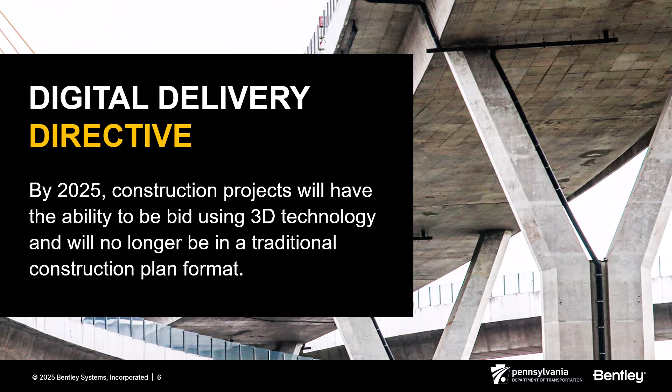It's a 3-year project. In that project, utilities, drainage, widening, that is all modeled. That is how it was delivered to the contractor. Initially, no cross sections even. So the contractor had no cross sections. I'll talk about some of the hiccups with that. But part of the hiccup is the technology. Having things as easy as flipping a page is what I've heard from the contractor. I can flip the page to get to that. How do I go over that?

So we set that goal, like I said. We met that. And part of the last conversation was, what is digital delivery? Well, really, we're trying to modernize how we deliver projects today, that process. And how do we do that? It's digital workflows. It's digital delivery. What are we delivering? How are we connecting? How are we exchanging the data? And can we repeat that workflow?

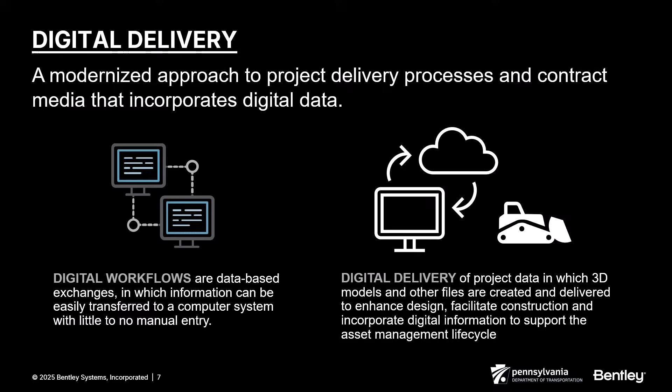If I can't repeat it, most of you are not going to adopt it. Most of you are not going to move along if it's something you have to relearn over and over again. So as part of modernizing this, we have to approach not only the technology, but the workflow. How do I reproduce this? How do I move it forward?

The other thing is, I talked about life cycle. To us, it's the life cycle. You know, in that traditional one, you spend a lot of time working on CAD files that somebody made a copy of to work on something else in it. There were duplications. There was that disconnect for review because you gave them a PDF that was sent out 10 times in an email and somebody had to bring all those comments back together.

We want to eliminate some of that because there's redundancies, there's problems, there's things that get missed when that connection's not there between the reviewers, the designers, even construction. So a lot of times we duplicate things because we weren't communicating. We had that disconnection. So you were siloed. You know, maybe roadway was working on something and bridge was separately working on it. They made a change, somebody over in roadway didn't get told to change. So you got to think about talking, and that doesn't just mean within the design units, that means construction, that means asset management, that means everything.

But as we move towards that model-based, that digital delivery, we want that single source of truth. I don't want silos. We want that connected environment. We want things that, hey, he updated here, my model updates over here. It's connected. There's that transparency. We're seeing that as it moves forward. Continual communication. If something changes, we're seeing it. We're seeing issues. We're seeing communication that, hey, I updated this today with the issues and things like that.

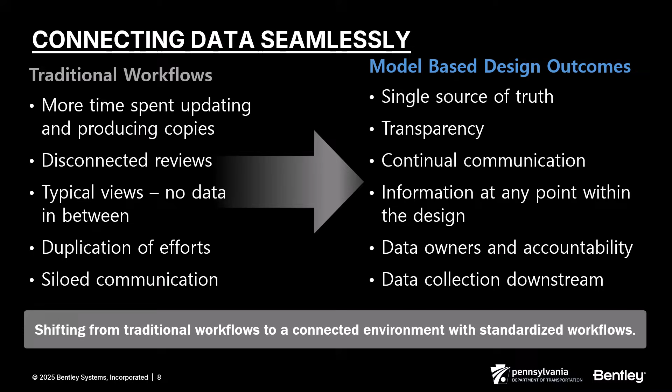What's that downstream deliverable? You know, we all kind of want that open standard that eventually I can give any file to any contractor and they can work on it. Today, it's an industry problem. I mean, today, I can give a DGN to a contractor, well, that contractor may use Autodesk, may use Trimble, Topcon, Carlson, whatever. They may not be able to accept that as a DGN. So hopefully in the future, maybe IFC or something else feeds into that.

So with PennDOT, one of the things that you really have to realize with digital delivery is it's standardized. If you don't standardize and give them a process to follow, you're going to fail. Part of this is, where do I have to put my effort? You know, we heard the comment about cost on that. How do I give them a direction? How do I give them the information they need to do this design and move forward? What level of detail is in that model? I got to set that. So we've done that interim guideline today that actually gives examples. It's not just text, it's visual examples. Here's what I expect out of you in that model. So we're trying to prepare that workforce for this policy that I'll talk about here in a little bit.

But again, we're also developing standards on the CAD side. I have to have that standard for the technology to work. If I have 10 different consultants and designers doing different workflows, using different features, using different labeling, that technology isn't going to know what to look for yet. Maybe in the future AI helps with that. But today, I have to set something so that it knows what to look for, how to check it, how to move it forward. So it's kind of setting that template, setting those resources, and developing that next process.

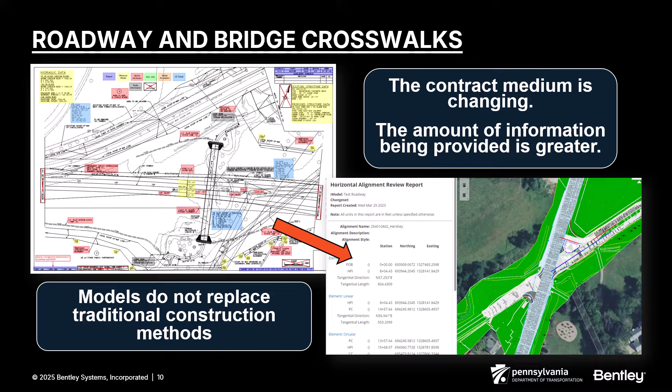Somebody goes into a sheet today, they know where they're looking for the information. But tomorrow, where do they look for it in the model? So we've started to develop those crosswalks that give them a legend to, okay, you found it here, now you find it here. It's building that transition. It's helping, it's change management. How do I manage the change for my organization as well as my business partners?

And I will say, there's lots of lessons learned. We have projects that have been built. We have the 68, where the model's a legal document. That's the one that's in construction right now. And then we have the ADCMS grant IFC project that's advertised right now that lets in 2 weeks. So we're in different realms right now.

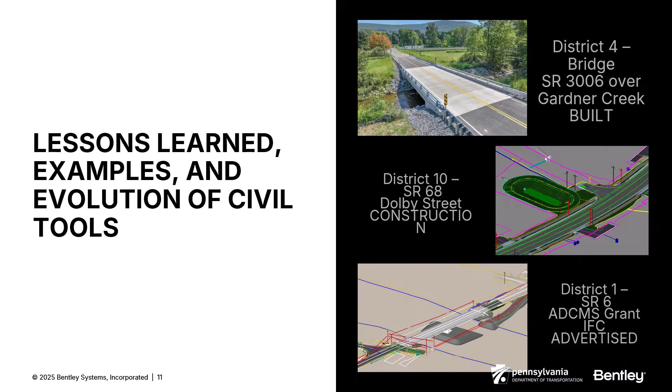We're not just doing everything as pilots necessarily. Some of them are pilots, but they're real life pilots. They're putting it to the test. It's trying it and not being afraid to fail at trying it. And again, it's being willing to adapt, meet the challenge, give the feedback to, say, Joe, or as a consultant or a contractor, give me your feedback. What's wrong with my workspace? What do I need to include for you as a consultant? It's that partnering.

One of the big changes, we don't have a plan set. So how do we shift from plans to a model? We took kind of a different approach. We have what's called a certification memo. This certification memo has a link that's embedded into it that points back to our ProjectWise through an API. Our internal IT wrote a program to go back to that. It gives the contractor the ability to go there, click there, and download anonymously.

So it's there. It's going to have an MD5 check on it so that if they download it, they can check to see it's the same file. We can verify it's the same file that's sealed in that document. So that's replacing our title sheets. The data's in our ProjectWise though. It's not sitting out on some other server or anyplace else. We are an on-prem ProjectWise today. So we're controlling that information today.

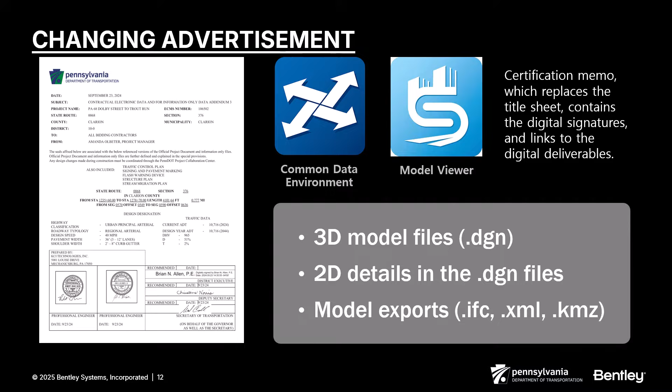And again, we're not making copies. We're not copying out to a bidding system or something like that. We're leaving it where it is, where that certification memo points to. It's that single source of truth. And again, as you heard, not just talking DGNs. We now have IFC files involved. There might be XMLs that are being provided as well because of that challenging construction to be able to digest the data.

So, how do we move this? How did we get to where we are? I'm going to tell you right now, part of it is vendor relationship. If I didn't have Joey and some of the other guys giving me new tools, trying to solve issues and work with us, we wouldn't be where we are today. We need more technology. We need more things to do what the contractors, what the consultants want. That's where our voice, when Joey was talking about the innovation council, that's how we voice our concerns, our needs, how we improve this. Again, like Kyle said earlier, it's that passion to do better.

But part of that is I need reproducible workflows. Because if I can't reproduce it, my consultants are not going to want to do it. If I can't make it so that I don't have to recreate a project, they're not going to want to do it. But the other thing is, I have to make this data to a point where designers, contractors, consultants, inspectors trust the data. It can't be the comment that, hey, you guys are giving me crap models and I'm not going to use them. That doesn't work. We have to do better.

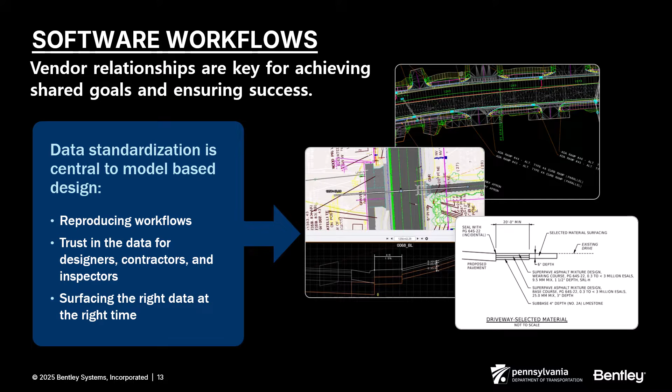And I use an example of that as superelevation. I went to an IHEEP one year. I went to 11 different DOTs. All 11 gave me a different answer for what superelevation meant from the AASHTO Green Book. So it has to be able to adapt to our organizations. Today, as I think Kevin kind of hinted, there's not that single standard that everybody's going to meet or follow across the country. So it has to adapt to that.

So let's listen to a consultant perspective on one of our projects.

Hi, I'm Rob Nuss. I'm with KCI. I'm the practice leader for the highway group here in Harrisburg. For the Route 68 project, I was a project manager, really responsible for pulling everything together and then checking the model. Rob, as the project manager, what processes changed or didn't change as part of this digital delivery project?

The big change is in the checking. Again, we don't have plan sheets, so you're checking the model with mostly checklists. But the overall process, the process of dealing with your subs, coordinating with PennDOT, line grading, typical section, that whole process really didn't change a lot. We still had summary sheets, we still had special provisions, we still had to load everything into ECMS. Just that final deliverable was really different with not having sheets, but in general, the process is the same.

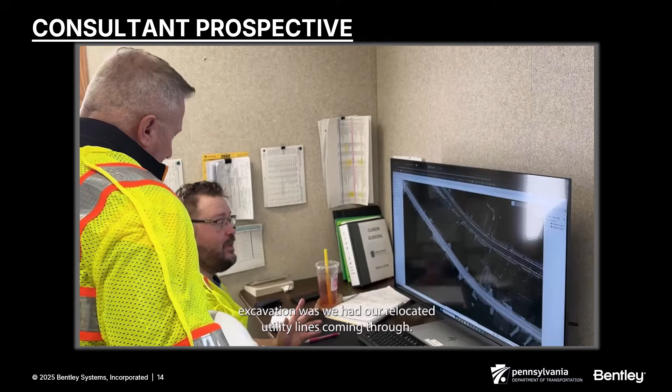I'm Steve Brown with KCI. I'm a senior project engineer. For the SR68 project, I was the model manager and lead designer. And you did the modeling of design. So what helped you with modeling all of it that you didn't see on the plan sheets? Yeah, one of the big things that we did notice when we modeled the culvert excavation was we had our relocated utility lines coming through, and we did see that with that excavation line that we were going to hit the new relocated water line.

So we had to alter it and move it, and that was one thing that we would probably never see from the previous way that we used to model things. And that was during design, correct? That was in design. You could probably save money if possible. I would say so. If it was not moved, they would definitely have an issue out there.

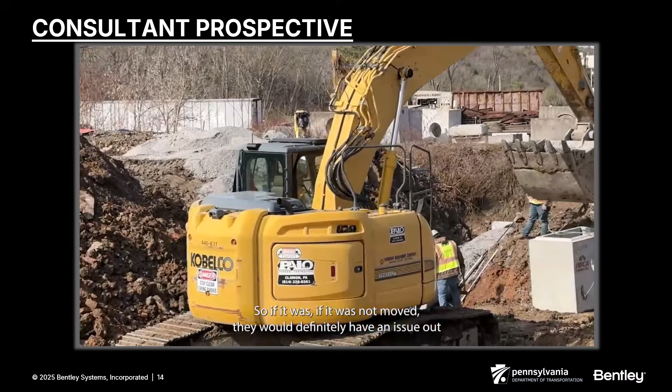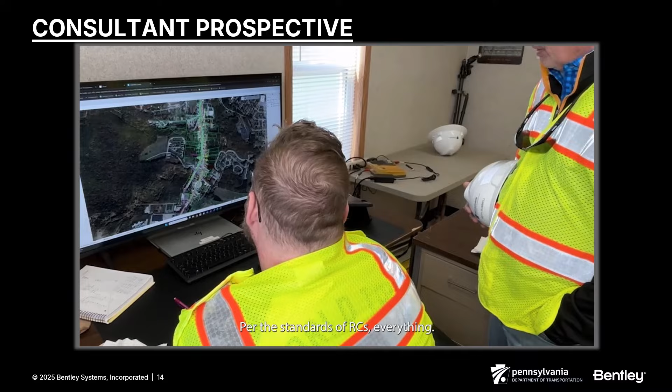Yep. Hi, I'm Megan Fry with KCI, Engineer in Training, at the Pittsburgh office, and I was a designer and responsible for utilities and drainage for the SR68 job. And Megan, you've been using OpenRoads and Infrastructure Cloud at the same time. So how did you utilize both programs to help you do your design better? Already, you can make the change while you're looking at Infrastructure Cloud. So in Infrastructure Cloud, you can do a profile, 2-point cross-section, a cross-section anywhere in the project. So if you were adjusting drainage, you can make sure that the pipe would be deep enough per the standards of the RCs, everything.

So you were able to utilize both products at the same time? Yes, Infrastructure Cloud is a lot faster than ORD. So if you needed something quick and easy, use Infrastructure Cloud, and then you can make the change in ORD once. So do you think this made your design faster? I do think it helps. I guess you can make design changes a little faster because you knew immediately what you needed to change instead of going in ORD trying to open up the profile or cross-section.

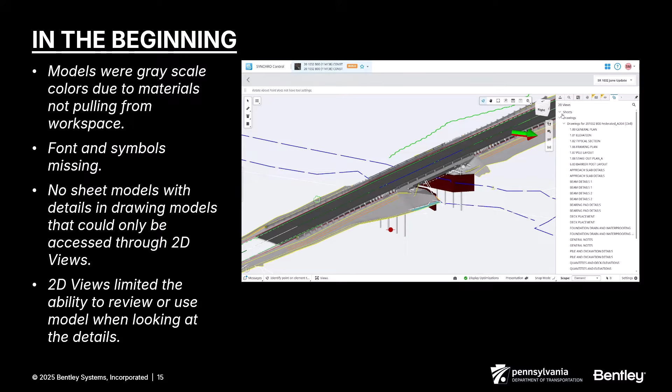So let's talk about how this has changed for us. That's the consultant's perspective today. So in the beginning, which 68 was one of our earlier ones, you notice the model on the screen. A lot of gray coloring. The materials weren't coming across. We had drawing views that, when you open them, you can't look at the model at the same time. So you had limitations. We had issues initially with ProjectWise and fonts even. So a lot of the stuff was hand-drawn. A lot of it was drafted still. It was data that somebody had to redevelop. It wasn't data that updated maybe with the model.

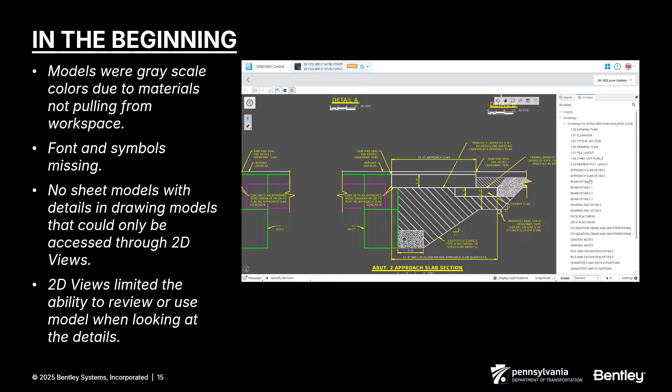But you can see here, it's very limited. Sometimes drawing models didn't come across. 2D views don't always work. That information isn't coming in one-for-one at times. So there were a lot of issues at the beginning that we had to go through. We had to address hurdles. We had to talk to Joey and the team and say, hey, how can we do this better? How do we go to the next step?

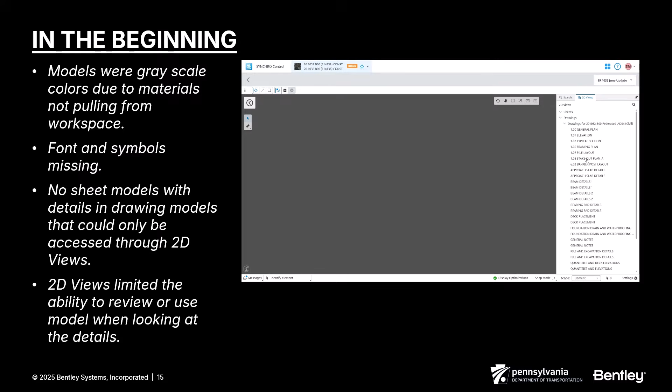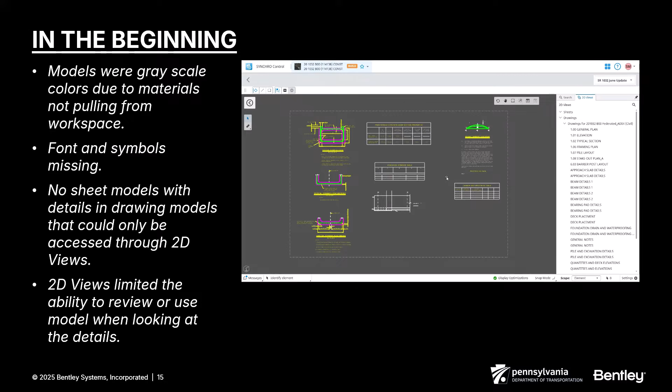So as we're going through that, right now I can see the model, but if I opened up the sheet back then as that drawing model, I couldn't look at the model. I couldn't look at the two side by side unless I opened a whole other window. That's not really easy to do a review if you're doing that, right? So it's very limited. Today, though, we're using data visualization.

We have pay items in here. So I can click on drainage, and I can say, all right, I want to see what's in this model drainage list. It's going to highlight. We're trying to give the contractors an easy way to get to the information. We can't just say, here's a model, try to learn how to read it. I got to give you some steps. So with the data visualization, I can start to point them to the drainage pay items. We can use drainage profile and look at the information for that system.

So now I have all that information that I can turn on and off too. Maybe I want to see a specific piece of information. And this isn't just important to me as a designer, it's important to construction as well, because they need that invert, they need that elevation to build. So it's information we both need.

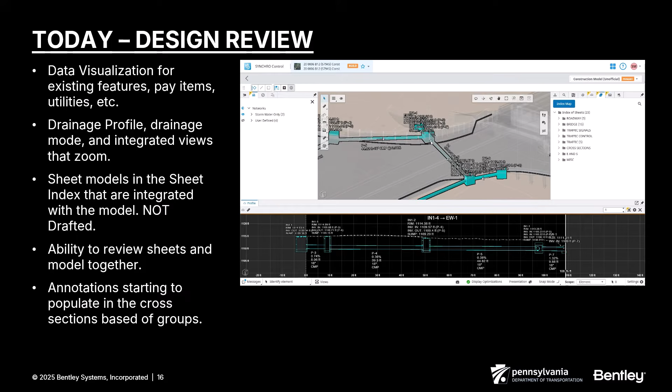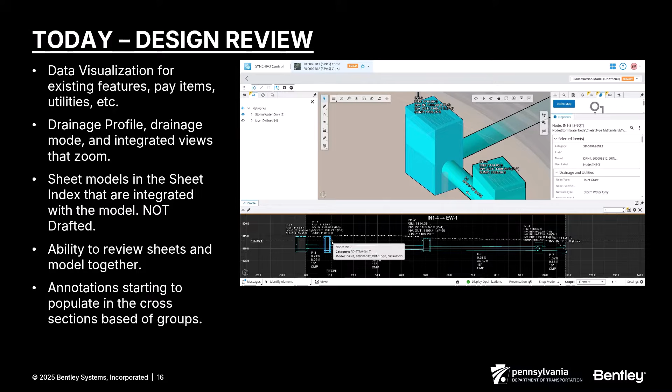And I can look at it through a profile. I can look at it in that 2D or 3D view. I can look at that information. And it becomes dynamic now too. I click on an inlet, it's going to take me to it in the 3D or 2D view there. That integration now is there, that the stuff is talking from view to view.

Think of a contractor, if they had that view up and said, hey, I'm going to work on these 5 inlets today. They can just go down the line, clicking one to the next as they need the information. And there's metadata on that information. The pay items are there, that information is there.

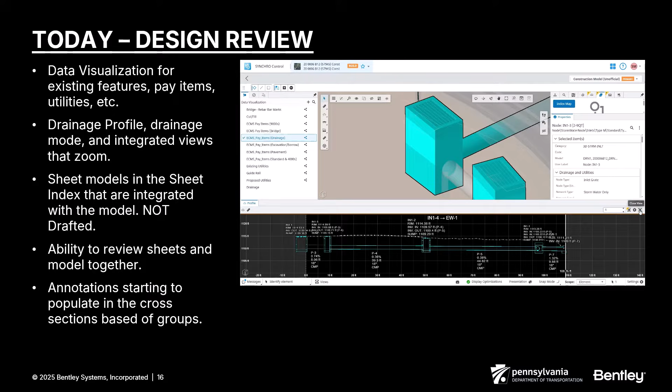So, beyond that, what else have we changed here? Well, sheets are in the sheet index now. They're not in those drawing models. So we're using sheet models like you do today with ORD. Same process you're doing, putting them into the sheet index there. That sheet index is what's pulling it across into infrastructure cloud. So I'm doing a workflow that's very similar to what I do today and getting another advantage to it.

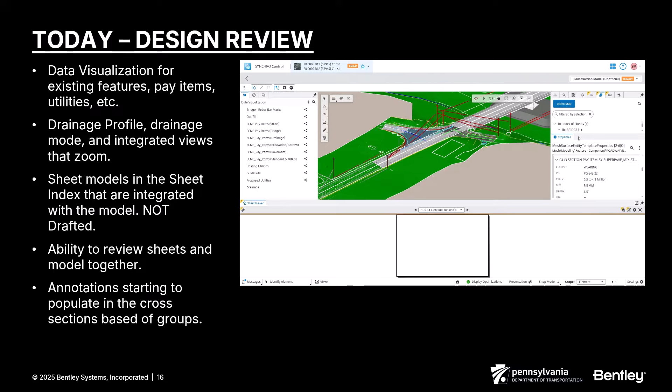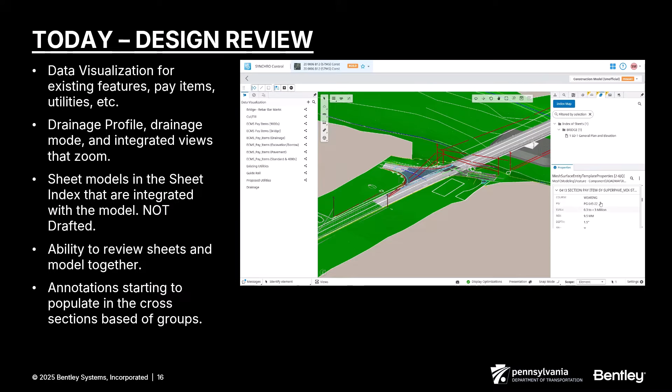I'm not creating a PDF review. I'm creating a sheet model out here in the software review that I can put issues on. I can track them. I can mark them up. The model can point to where it is, or I can go in there to that list, and you can see there's a folder structure. That folder structure is what I have set up in my sheet index in ORD. It comes across, looks the same.

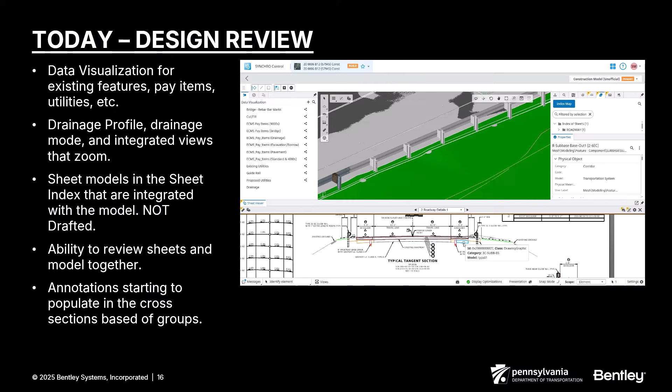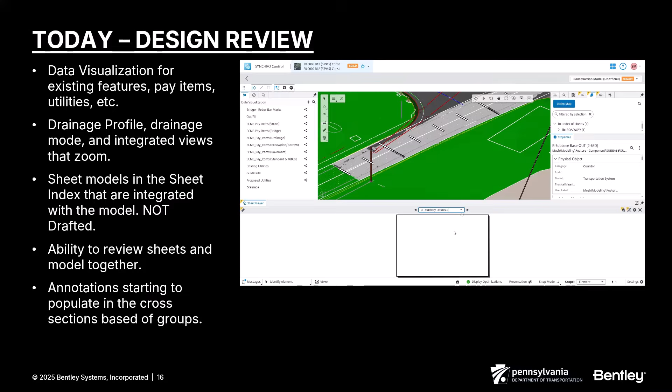Now, these typicals, they're not hand-drawn, they're not drafted, they're interactive. They're slices of a model. It's integrated. It's not something somebody drew in 2D that doesn't update. It's information that if that model changes, it changes.

So we're starting to really get to that integrated piece where providing a PDF is kind of going backwards. If I can look at the CAD file for where they are, I just saved a step. I don't have an external piece here now. It's part of the model. It's delivered in the model files.

And while I'm looking at that sheet, I'm looking at the model, I can open cross sections even. So I have multiple views, multiple ways to look at the information. I'm not stuck with just the model or just the sheet. I have all that now.

We talked about annotations. There's some stuff coming here. Now you see we're starting to get annotations that are based off of groups. So I can dictate, hey, maybe I want these things to have width, depth, elevation, offset, that information there that maybe I want to be able to turn on or off. Maybe the contractor wants to do one operation that day. I can break the information up.

I'm not just giving them a cross-section that has all kinds of annotations on it that are cluttered and close together. Now they can turn things on and off. They can adjust that information we're looking at.

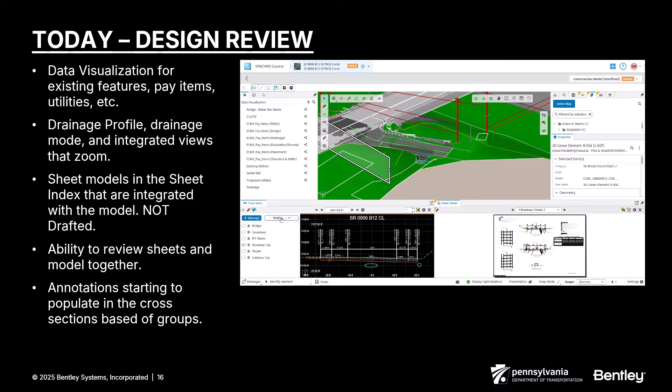The other thing, before I start the video here, you'll see there's a filter. This is version compare. We started versioning files. We started setting them up so that we could version the models in there. By doing this, I have an audit trail of how the model changed. And you can see there in that filter, there's added, removed, and modified. And you'll see what that does here in a second.

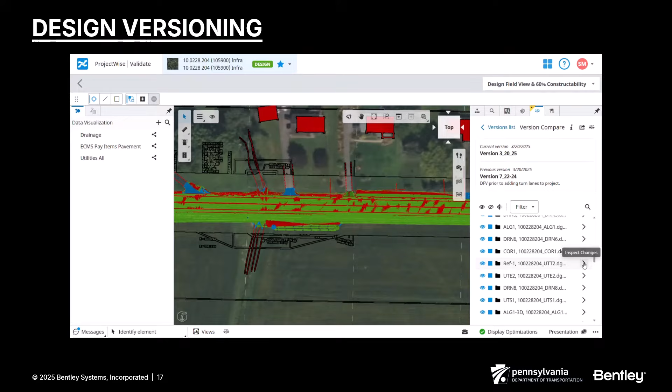So everything in red is removed. Added is green, and the blue is the modified. Now I can interrogate this as an entire model, or I can interrogate it as an individual file. And the example I'm going to use here is drainage, because drainage gave a great example of this.

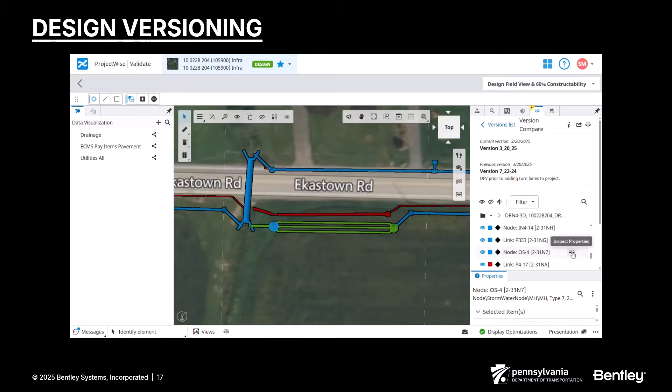So in this case, this project went from a 2-lane to a 3-lane. They had already designed it as a two-lane network. They were just going to go through and do that. So they eliminated the pipes that they had in the initial model, moved that one manhole out, and added the new pipes. I can see that change.

But I could also go in and inspect the properties. So now I can see side by side the information that changed. The node name, the elevation, the offset. The information is there that I have a way to actually find it.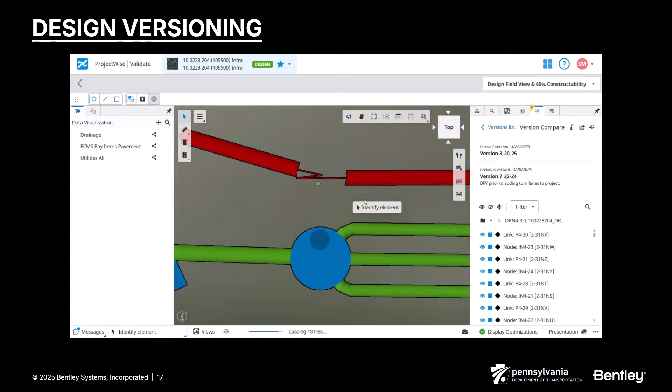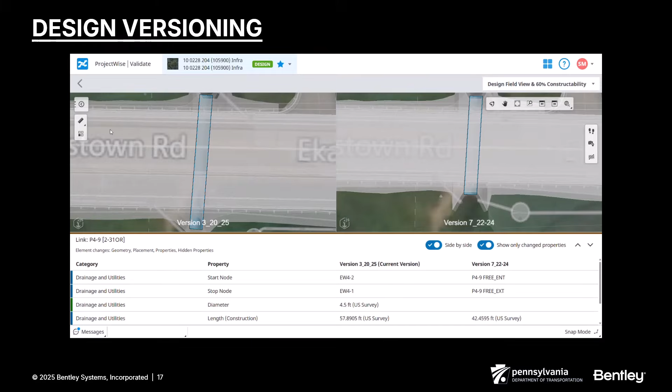If I'm going through this visually, just looking, I may miss something that moves 6 inches, a foot. With this, it gives me a way to track and check and start really interrogating the model. And it works for pretty much anything in the model. Whether it's pipes, end walls, maybe an item changed on the pavement, it's going to reflect that through the version compare. So we're starting to get the tools to really start interrogating models.

Something like this is one of those pieces that you had to have. Otherwise, I can't say that I was checking every single piece of this model. It's hard to see every change, to know every change, especially when you're talking now metadata.

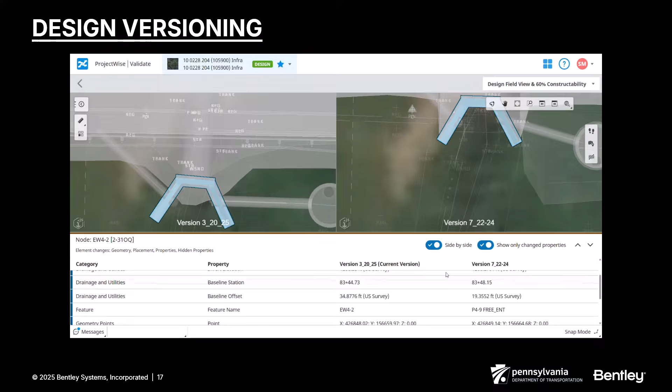Cross-section. So I kind of hinted at this. This is one of those areas that we're kind of readjusting with construction. So contractors like the dynamic section, yes. What don't they like? They need to manually place an offset and elevation. So talking about that annotation and auto annotation, which is a work in progress. This is not finalized. It's still being worked on, trying to clean things up.

But the thing about it is, they still keep asking for some paper. And one of the justifications we've heard is, I have laborers. I have people that won't have an iPad. I have somebody that's tying rebar on a bridge abutment in a mud hole. I'm not giving them a $2,500 iPad. So they still want something they can use or a way to kind of get that information.

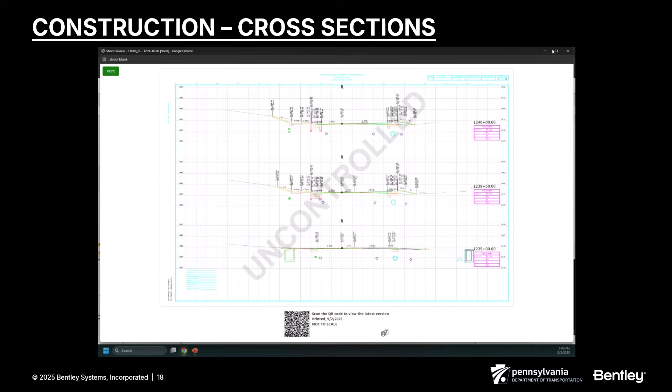So you can see here, cross-section, just like you see in ORD. They come in, you can see the 3 lines showing what's on it. Oh, hey, there's a print button. You can see it says uncontrolled across it. The uncontrolled is to be a warning to the contractor. I need to verify this is a usable piece of paper still. I need to go back with that QR code and check to see, did the model change?

And I can tell you, we've delivered one project with a model where a 2D deliverable was printed, given to a third party. A construction change happened. They didn't give the updated sheet. The result, there was a bridge built 3 feet off. So, controlling that print, controlling that information, making sure that they're using the latest information is very important. So if you do go to a print, make sure you have a way to control or point them back to the data you're using. That's a key part of that.

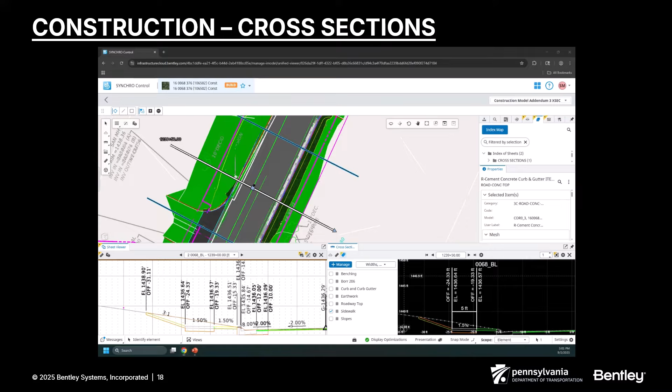We've learned that lesson. But you can see all the information, whether it's through annotations, whether it's through sheets, the data's matching. It's there. And who knows where this could go in the future. There are still thoughts. How do we improve this more? But again, there's lessons learned. Hey, I can deliver it, but maybe that contractor takes that DGN and prints it on their own. That's where we want to start controlling where they print from, where they get the data from. That single source of truth. And control what comes out of that single source of truth.

So let's listen to the contractor. Tom Stefanski with Minneke Contracting, Northeast Pennsylvania bridge contractor. We employ about 50 to 60 personnel throughout the course of the construction season. My role on the project is on the front end, estimating the project, and then during the course of construction, some project management duties and technical engineering.

What would you do differently on the next digital delivery project? From the bidding aspect, I know my way around the system a little more, so I do a lot of things differently. Just simply more educated now after experiencing the process from start to finish. From a construction standpoint, I don't really think that there's too much we would change. I thought the personnel on the project did a great job, and the entire team did a great job.

Since the completion of the digital delivery project, have you incorporated any lessons learned into other projects we're currently working on? Simply communication. The next time we do a digital delivery project, we can take what we learned here with us. Do you have any final points you'd like to make about the project or digital delivery process? However, wherever the digital delivery process goes, don't forget the small subs and suppliers that don't have the resources to navigate the system without specialized equipment and training.

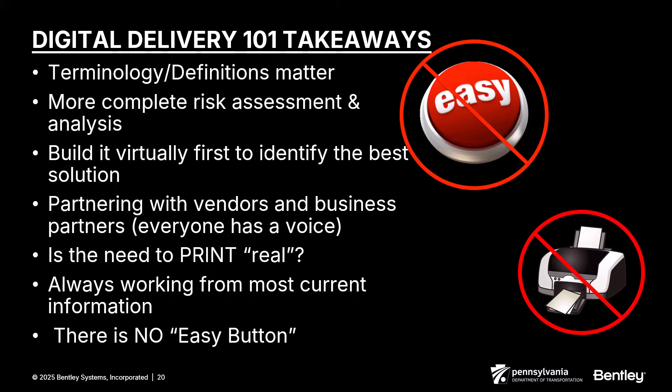So what's to come? PennDOT, August 7th, had the implementation policy signed. What's this mean for PennDOT? Each district in 2027 will have 2 projects that will be delivered as digital projects. We have 11 districts, so that's 22 projects. '28, 3 projects. '29, 4. '30, 5. So in '30, that's 55 projects.

The other thing, beginning in '29, integral abutment bridges less than 90 feet in length will be digital delivery. 2030, new construction and reconstruction projects of a roadway will be digital delivery. And this is all being housed in our ProjectWise on-prem. What does that do for us, putting it on our ProjectWise? I manage the workspace. I manage the change.

The best way to keep this going is to standardize and make sure you're managing that change, controlling that change. I don't necessarily want consultants changing the workspace or deviating from things that are in our standards. I want them to come to me and say, hey, I need this change to do my work. I need this. Give me the feedback. Let me adapt it. Let me meet your need. Then we have one source for that workspace.

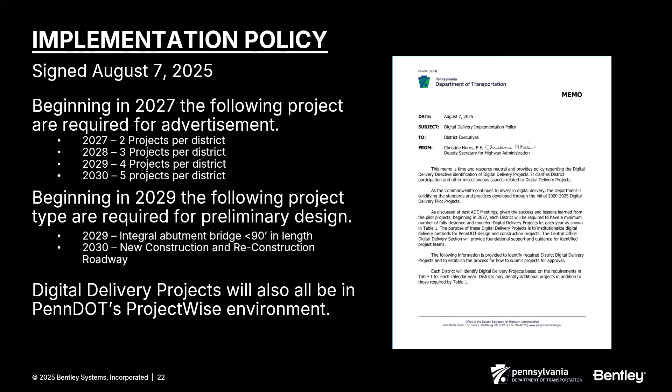I don't have something that maybe you've adapted, I've updated, and now your data's overwritten because you've done it someplace where maybe I've already made changes. So we want to control that interaction. We want to work together.

The other thing I talked a little bit earlier about, higher education. We are talking to 17 different universities across PA. We're doing presentations at them. We are talking to the students. We are showing them what we're doing, what the products can do, giving them a sandbox to go into. So classes are actually getting into our data sets and looking at the information we're producing. We're giving them that chance to experience this and learn it.

As part of this also, those universities are working with us to develop future curriculum. How can they prepare for that next wave of engineers? How can we prepare them to do what we're doing today? Because we know training is part of the process. We want somebody who comes in possibly available and ready to run with the project, not that I have to spend 6 months, a year training them to do some of this stuff. So if we can prepare that next wave, we want to do that.

So again, we want to start to get the next generation even thinking about this. This isn't just for me, this is for the future. And again, it's a partnership. It's not just design, construction, it's even future. It's beyond what we're working at today.

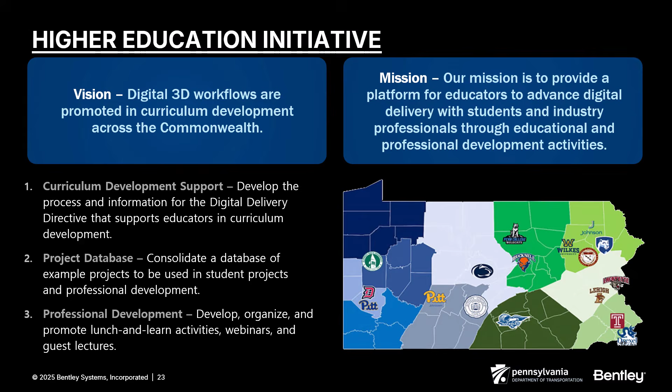So Joe. All right, thanks, Scott. I've only got a short amount of time and so much to say, so I will do my best to keep it brief.

Number one, I hope you saw what the reality of today is. The ability to deliver digital data, a three-dimensional model on real projects being bid, let, and built is going on now, today. So we're not dreaming about 5 years or 10 years or 20 years. We are pushing the envelope today. With that, as I've mentioned before, we are actively working with the industry, with all of you, to develop the technology that's needed to continue to push that boundary.

To continue to make models come to life for contractors, inspectors, reviewers, designers, anyone who needs to interact with the project. It is our goal to make that digital content as easy as a plan sheet. Okay, and that's a tall order, we understand that. But the opportunity to elevate everything we do as designers, the content that we create, that deliverable that we produce, this is the opportunity to take that deliverable to the next level.

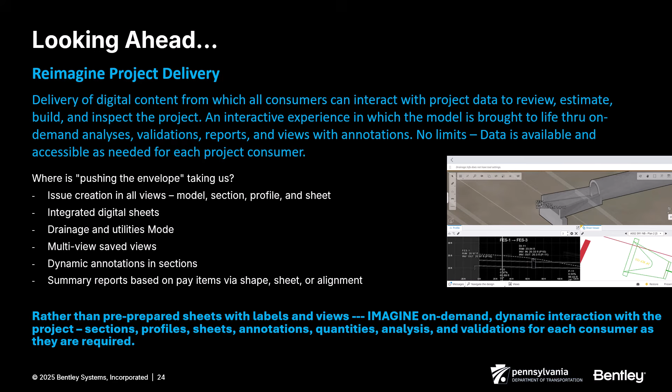Okay? Now with that, I hope you get the mental picture of where we are in terms of making the model consumable and making that model come to life in a way a plan sheet never, ever could. Now, I'll share a bit of highlight reel functionality with you next. So again, dream big. There are no limits. Don't be limited by what we've done in the past or what we have today. We are building the future. And that's the most exciting thing about being a part of the industry at this time. All right, with that. Again, pushing that envelope, dreaming about what's possible, and taking that forward.

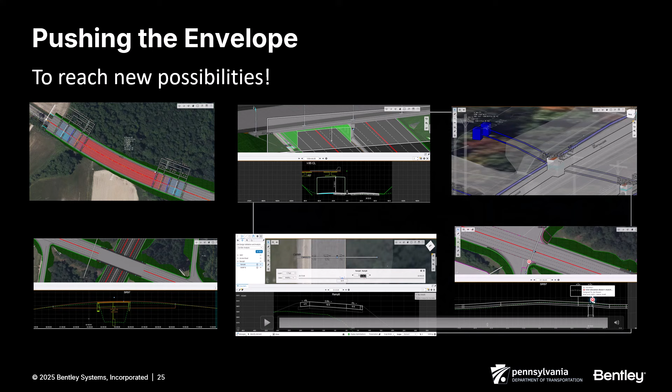And the young folks following behind us can say, my gosh, you know what they used to have to do? Wow, that's amazing. We might as well have had a pick and a shovel out there. That's crazy. So again, the point of this is to show you what's happening today and to share with you the potential and the technology we're actively developing to take us to the future.